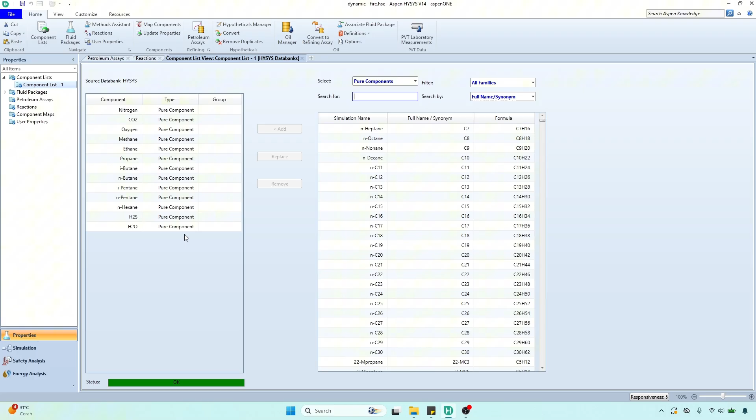At the beginning, we have to specify the component. Then we have to specify the fluid package. I chose Peng-Robinson since we are dealing with these non-polar components.

First, you can specify the feed stream composition. You can use your own composition or follow this composition.

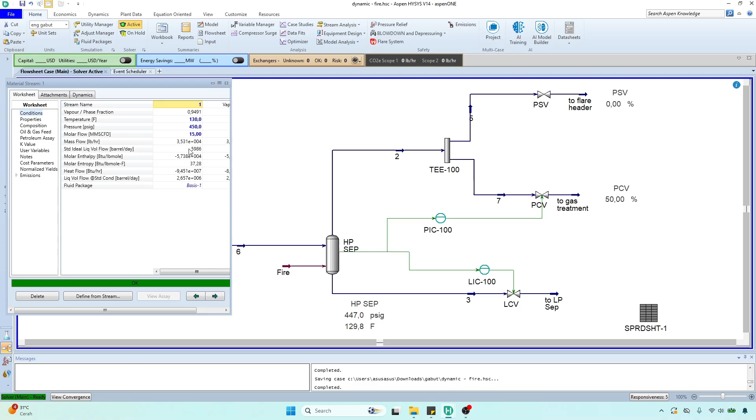For the operating condition, you can follow me as you can see here, and afterwards you will be at the valve here, and at the rating tab you can follow me for this valve specification.

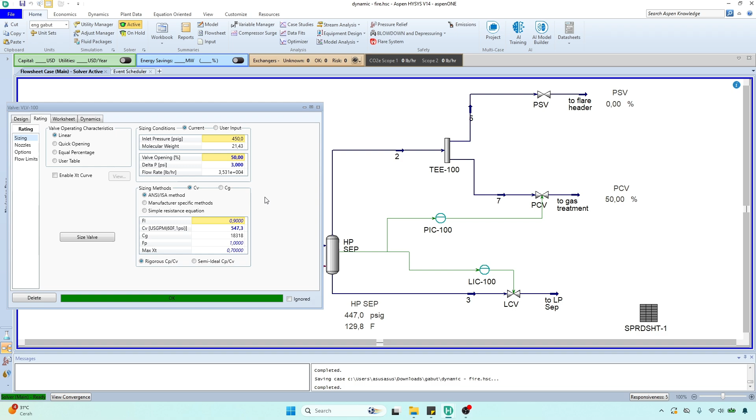Then for the pressure control valve, as you can see here, you can follow me using the specification of pressure control valve, and for the level control valve, as you can see here.

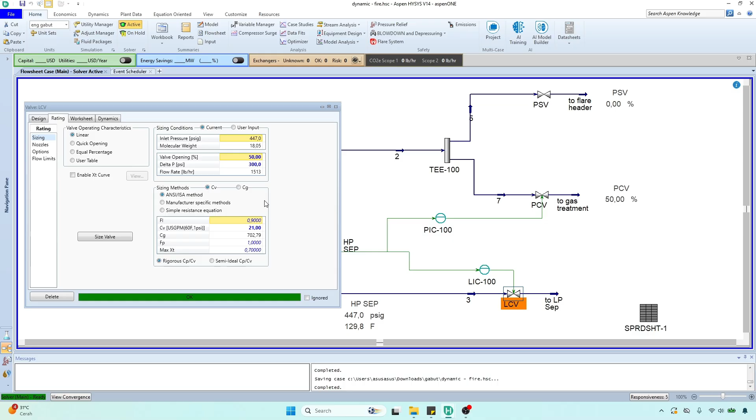And since we operate the system at about 450 pound square inch, you can set the pressure safety valve at about 500 pound square inch, and for open pressure we assume that this relief valve or safety valve will fully open at 21% above the set pressure, approximately at 600 pound square inch.

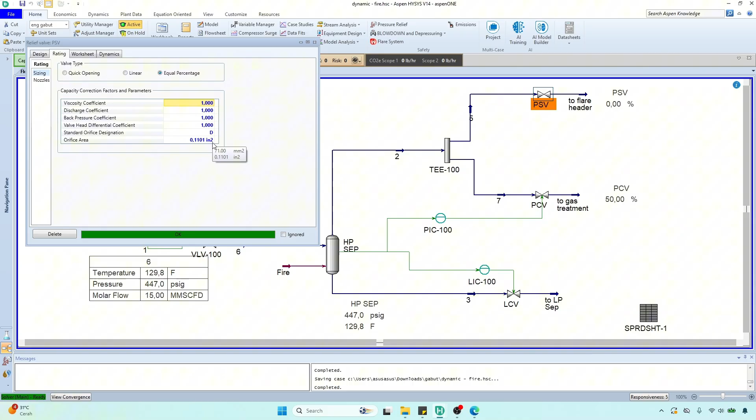For the orifice area, you can use D with the orifice area about 0.1 square inch, and choose the equal percentage type.

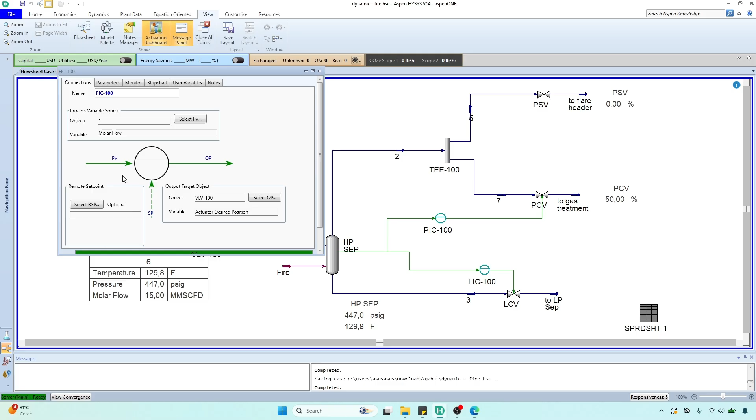Then we can add the control loop here. You can add using the PID controller and connect the target variable, or object, which is the open percentage of this valve, and then for the process variable, it is the molar flow itself.

Then you can choose reverse. You can follow me regarding the specification of this control loop.

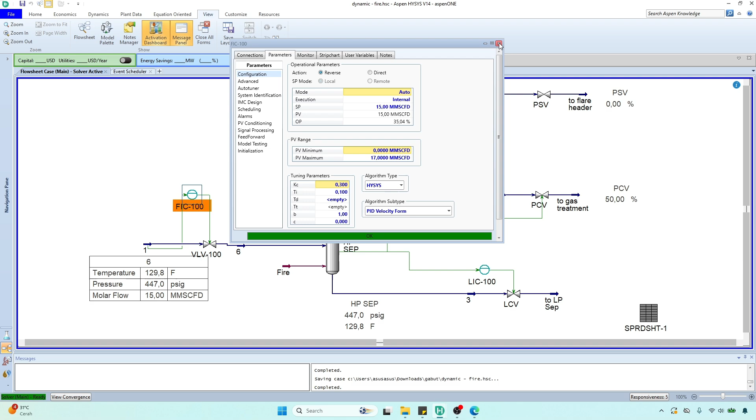Then for the pressure control valve, which is maintaining the pressure of the high pressure separator, you can use direct, since if the pressure increases, the opening of this valve increases as well. You can use the specification shown.

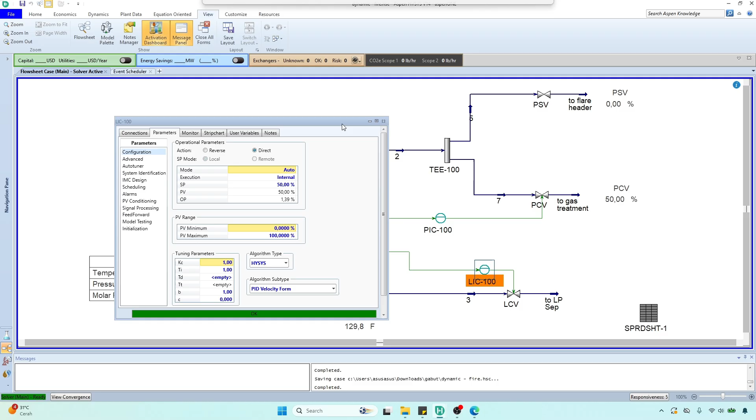Then for the level controller, the same as before: here is the opening percentage of this valve, and the process variable is the liquid percent level of the separator itself.

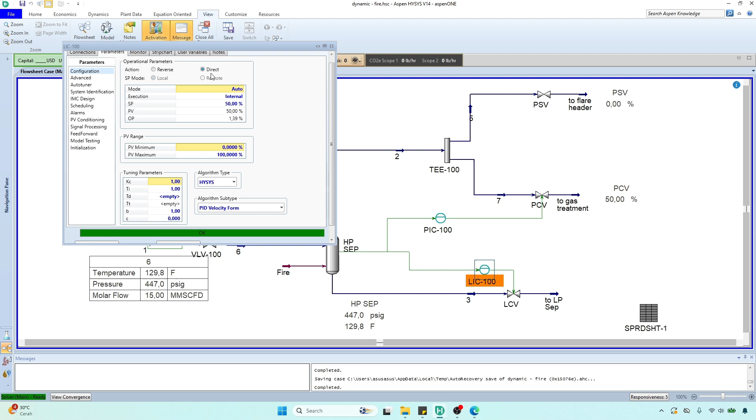For the parameter, you can refer to the specification. For the action, it will be direct, so the valve will open once the liquid level increases. And the mode is auto; you can refer to my specification here.

And for the numbers indicated here, you can use the show table option, and you can specify the parameters you want to monitor at each stream.

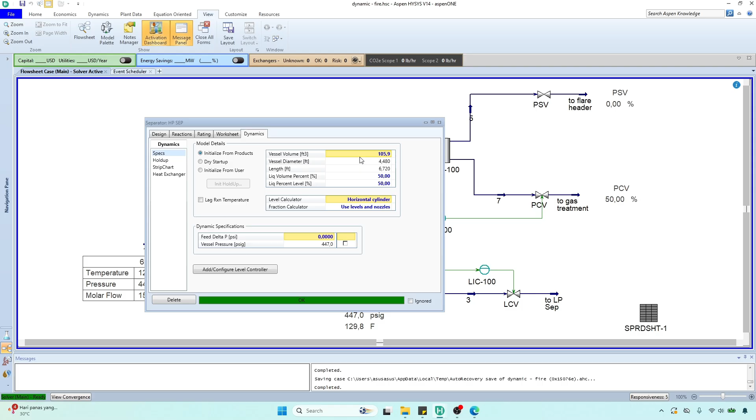Then you can specify the volume of your vessel. I specify about 3 cubic meters here, and then let HYSYS calculate the diameter and the length of this vessel.

But you can use your own dimensions for your vessel to represent your actual vessel here. And I chose the horizontal cylinder.

And for the initial value of the liquid percent, I specify 50% here.

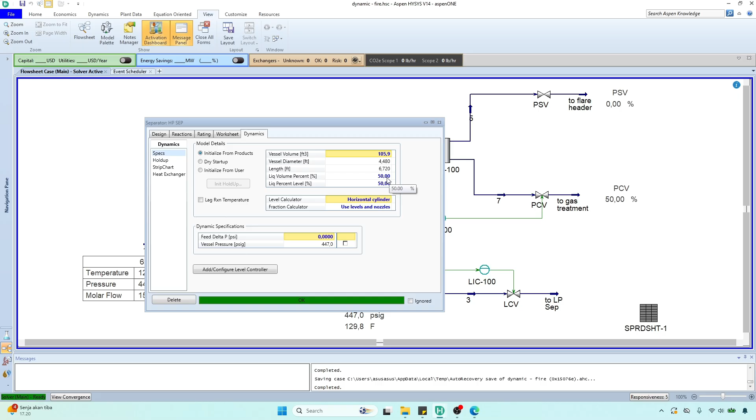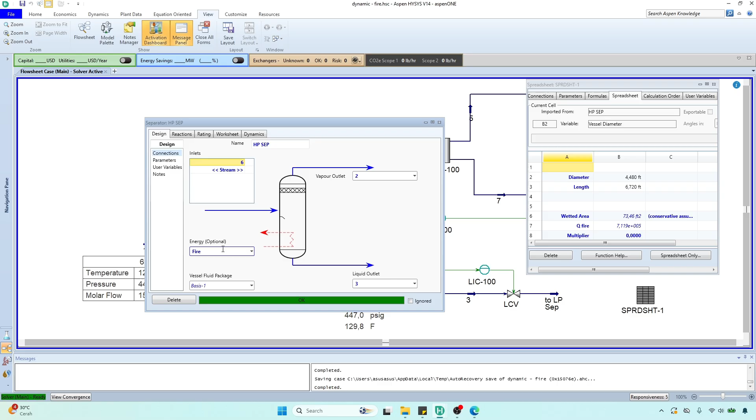And for the fire itself, I assume the fire will give duty towards the vessel, so I add this energy stream to the vessel. Here I name it as fire.

And for the diameter, you can use this import variable, and then you can choose your HP separator, and you can specify what parameters you want to select in this spreadsheet. For the diameter here, you can see vessel diameter, and for the length, you can use here. And for the wetted area, you can use this formula.

I assume this conservative assumption, that the vessel wetted area is about 50% of the vessel height itself.

And for the duty of the fire, I obtained this from the API 521 recommended practice. You can use this formula as well. And for the multiplier, I specify 0.

So at the beginning there is no fire exposed to the HP separator, and then after some time in the study, the fire will be applied, so the multiplier will change to 1, and then the fire duty will follow this formula.

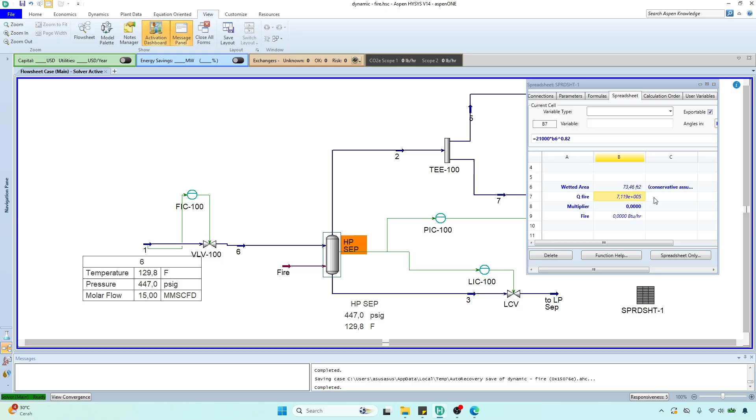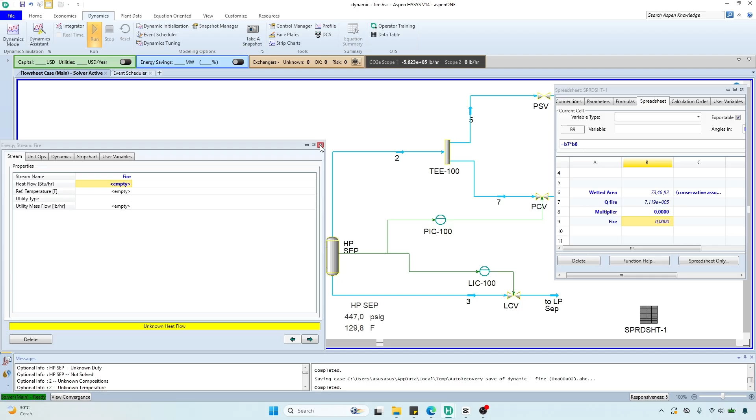Perhaps I can demonstrate how to connect this energy stream. You can delete it and then create a new one by connecting the stream, and name it as fire. Afterwards, you can export this cell's value, export formula result to this fire heat stream, and choose the heat flow. So that's all to connect this fire with this energy stream.

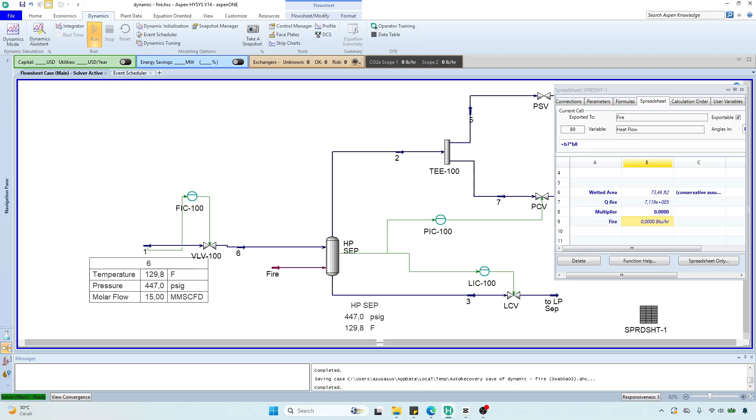For the flare header, I specify nearly atmospheric pressure to represent the actual condition of the flare header system. Then we will specify the event scheduler to specify what will happen in the study.

You can add schedule 1, which consists of sequence A. Sequence A itself consists of 2 scenarios. The first one is the fire scenario, the scenario where the fire is initiated.

I decide the fire will initiate at minute 30, and the action list itself is for the fire to check B8, change the multiplier of fire by 1, as I mentioned before in the spreadsheet function.

During the fire case, the pressure control valve will be closed, the level control valve will be closed as well, and the flow control valve is also in closed position. Afterwards, we assume that the fire is extinguished after 3 hours by the fire protection system.

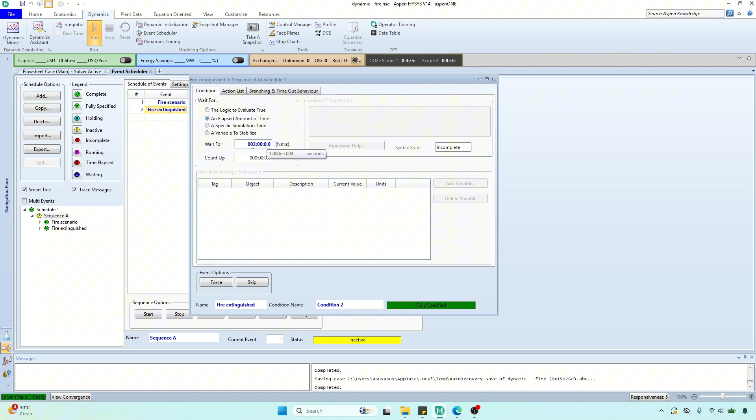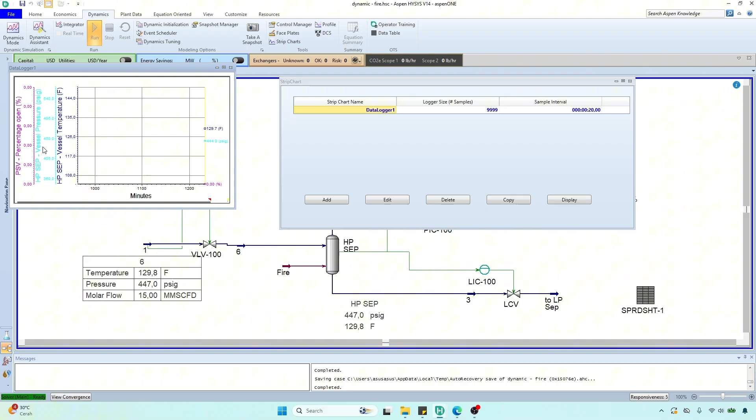Then we can add the strip chart here, and the things I want to monitor are the vessel temperature, the pressure, and the opening percentage of this PSV, the pressure safety valve.

So the pressure will operate normally, and then at minute 30 the fire will be initiated, and we will see what will happen.

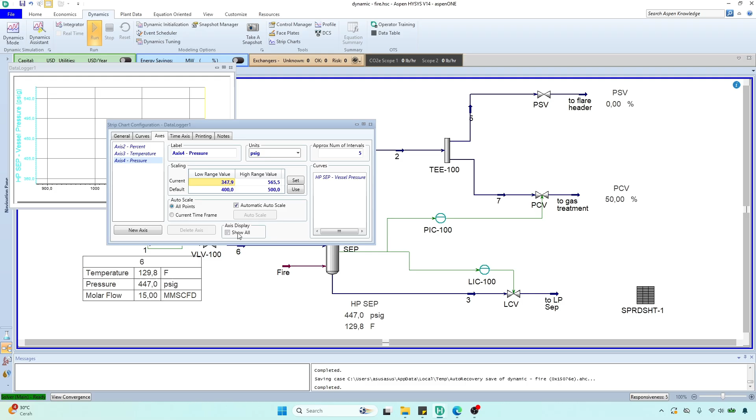To adjust the strip charts here, I chose the vessel temperature, changed it to axis number 3 for the PSV opening percentage and the vessel pressures, and using this automatic auto scale and axis display, adjusted to show all axes that we want to monitor here.

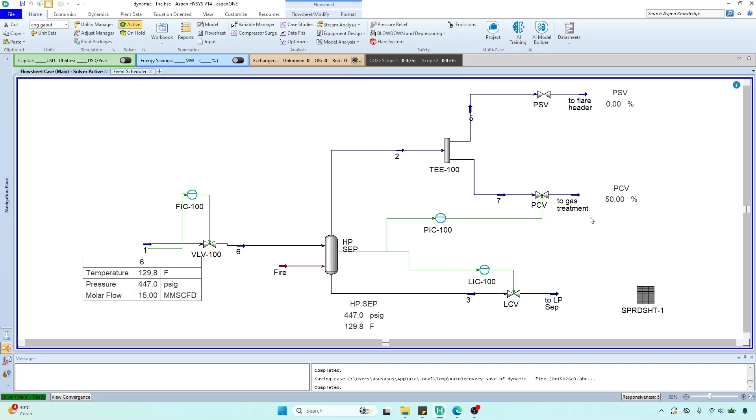So the event scheduler we adjusted before will change this multiplier, the B8 value. Before we change to dynamic mode, ensure the boundary stream is already changed to the pressure specification, here indicated by green color.

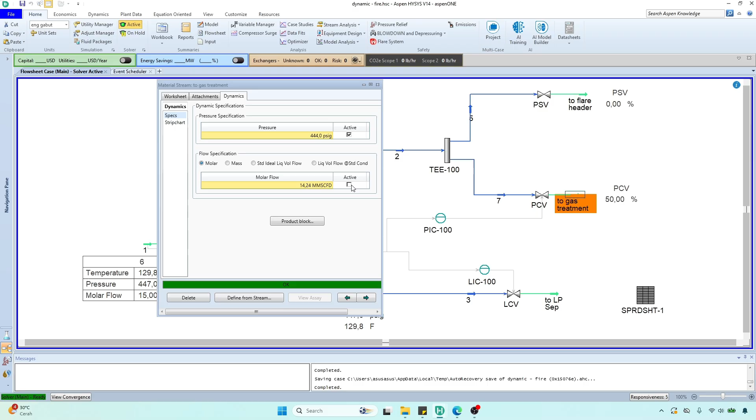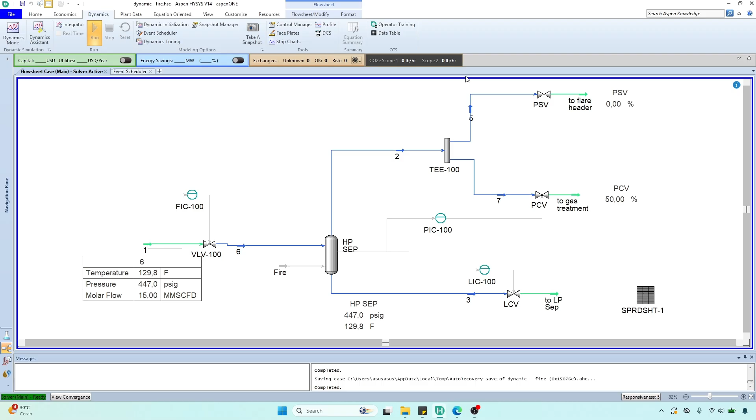You can use the dynamic tabs and ensure this one is checked, and the flow specification is already unchecked. Ensure there is no issue in this dynamic assistant, so we can start our dynamic simulation.

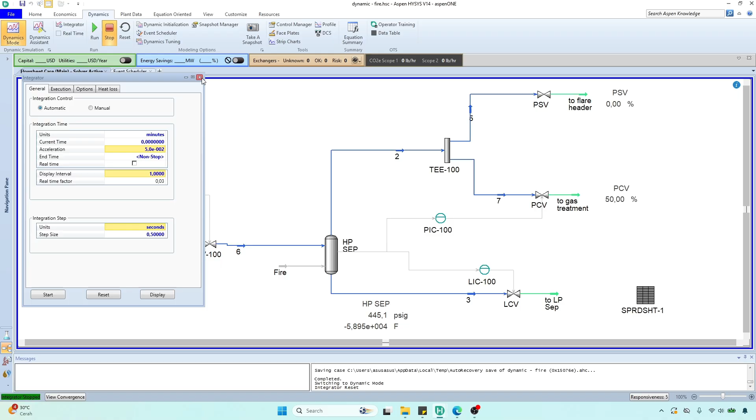You can choose this dynamic mode and go to the integrator, and I want to see the acceleration is 0.05, the acceleration of 5%, and we can start the event scheduler before we start our dynamic simulation.

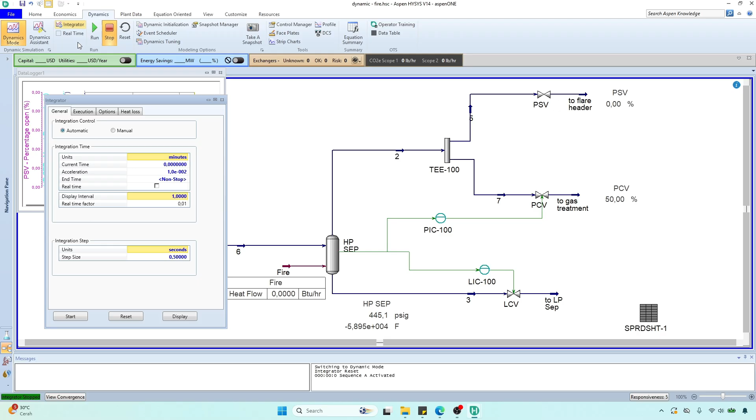Then here I want to see the strip charts. I want to change the integrator to 0.01 so we can monitor the operating parameter more easily. We can start the run button here to see.

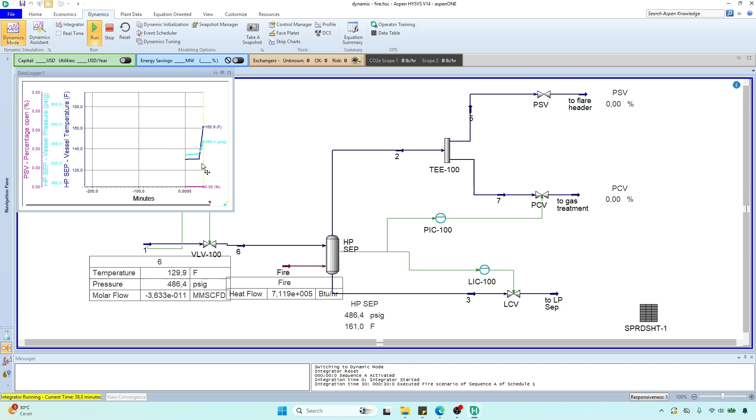At the beginning the vessel is operating normally, and then at minute 30 the fire is initiated. Here you can see that the temperature of the vessel increases, followed by the pressure increase, and after the pressure exceeds 500 pounds per square inch, the PSV will open.

Here we can see the PSV working to manage the pressure so the pressure will not increase violently, and it is controlled near the set pressure.

As the pressure increases, the opening of the pressure safety valve increases as well. Exceeding 550 pounds per square inch, the opening of the pressure safety valve is about 26%. Temperature is already stable since the content is already vaporized.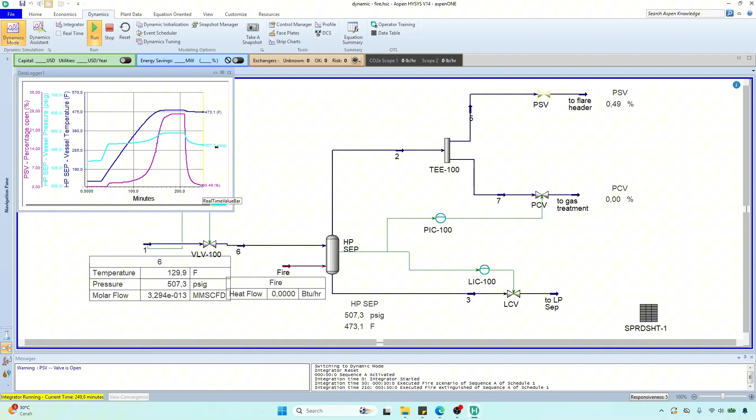After 3 hours, we assume that the fire is already extinguished by the fire protection system, and then the pressure decreases as the fire is extinguished, followed by the temperature as well as the opening of the pressure safety valve, as the pressure is already decreased to the set pressure of the pressure safety valve.

You can see here that the pressure of the vessel was maintained by the pressure safety valve, so the increment of the pressure will not increase violently. It can be controlled here.

So I think that's all about this video. I hope this video is useful, and see you in the next video.